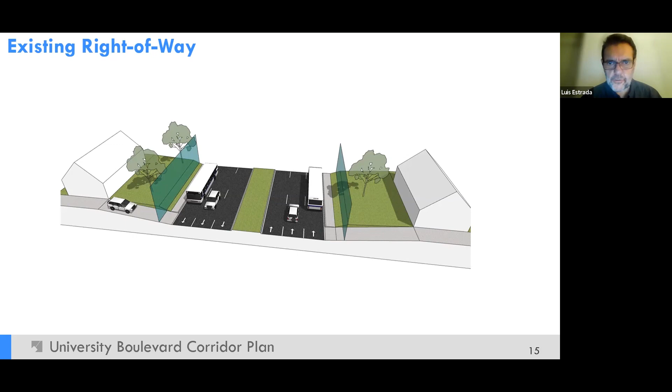For those of you who are familiar or not, the right-of-way is the land reserved for passage of vehicles, utilities, or people once a subdivision is created. Those strips of land reserved for mobility purposes are, for the most part, either owned by the state or the county. It's important for us to help convey how much space we have available so it's clear what parameters we'll be working within.

We have two snippets of record plats of a couple of subdivisions along the University Boulevard corridor that show the two prevailing conditions as far as boundaries are concerned. On the right-hand side, we have a segment of a subdivision recorded when the road was still referred to as Old Bladensburg Road. Back then, the recommended right-of-way - the distance between property lines across the road - was 100 feet total, and most subdivisions back then dedicated to 100 feet. That's what's recorded for the most part on the land records.

On the left-hand side, we have a different condition. Starting around the 1970s and 80s, a number of master plans for the various communities along the road recommended a greater right-of-way, foreseeing a greater need for space as the county grew over the years. After those plans were approved, recommending a right-of-way of 120 feet, any subdivision that came after dedicated to that number - 120 feet.

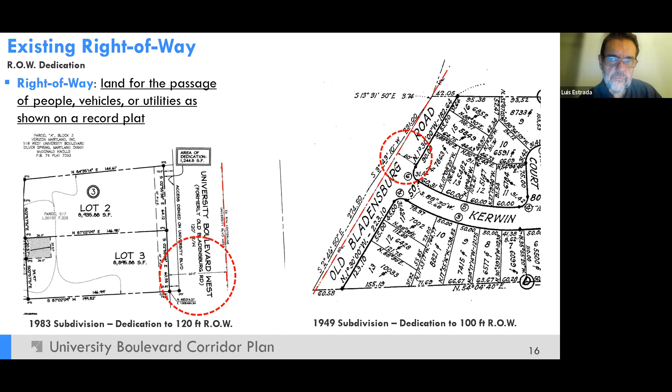As a result, if you go to the next slide, we have the condition illustrated on the map on the left-hand side, where you have a combination of blue and pink lines. That irregular condition is what we have in the corridor today - those are the lines on the land records as they exist today. Some of the lines, the blue ones, still conform to the 100 feet dimension - that's our primary condition. The pink lines are segments of the road that were subdivided at a later date and dedicated to 120 feet.

Those two conditions are to the extent that they are mapped on the road are on the land records. On the right-hand side, the lines that you see in red, we have another set of parameters that we will also be looking at.

In 2013, the Countywide Transit Corridors Functional Master Plan recommended that the overall right-of-way for the road would grow to 124 feet. Again, as a recommendation made thinking about the future of the road and the future needs of the communities along the road and the kind of facilities that are projected to be accommodated within those boundaries. And there's always an expectation that perhaps a bit more space will be needed.

What we will be doing as part of this master plan is evaluating all these different dimensions and trying to figure out how can we tighten up this envelope. If you go to the next slide.

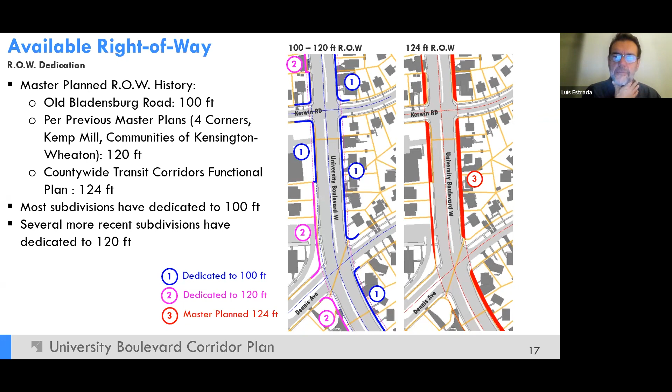This is a map that actually illustrates not what's mapped out and recorded on the ground, but what the recommendations are for the various segments of University Boulevard that are included as part of this master plan. And as you can see, we actually have master plan recommendations. Again, there's a clear distinction between a master plan recommendation and what's mapped on the land records. These are master plan recommendations.

We have, for example, a segment between Amherst Avenue and Dayton Street. This is close to the Wheaton CBD area, and that segment is recommended for 150 feet because it was expected that a greater intensity of uses and transit services would be needed as you get closer to the CBD.

Then between Dayton and Lorain Avenue, the master plan recommendation for the longer segment is the 124 dimension that I mentioned before. Then between Lorain Avenue and Williamsburg Drive, the recommendation is still from the master plans created in the 70s and 80s, which was 120 feet. And then the remaining leg, between Williamsburg Drive and 495, is 124.

All these are, again, master plan recommendations. And part of what we do in a master plan like the one we're doing right now is assess how we can tighten that by exploring the actual facilities we'll be including within the right of way. Next slide.

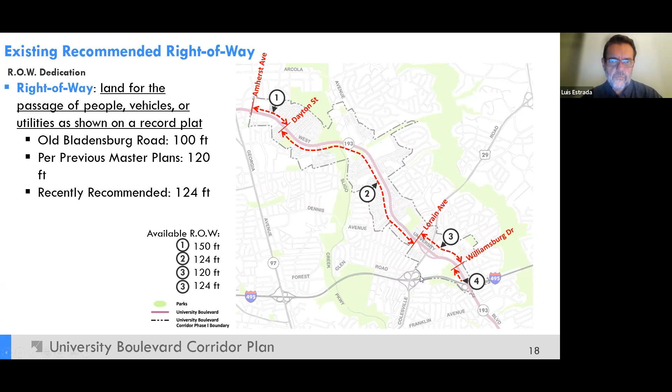As a guide to determine how those facilities will lay out, we're following the guidance of the Complete Streets Guide that the planning department prepared and put together, approved and published in 2021. That guide explored all the different types of roads we have within the county and came up with prototypes that break down the different components you ideally want to include in each type of road if you were to improve it.

There's a menu of elements loosely illustrated here, and I can go further into that later in my slides. The type of road recommended for this is a boulevard type, because it provides cross-county and regional connectivity, which University Boulevard does. It includes a variety of building and land uses, bicycle and pedestrian infrastructure, various land use types, landscaping and street lighting, as well as dedicated facilities for buses. That combination of elements is what we will be exploring as part of this master plan.

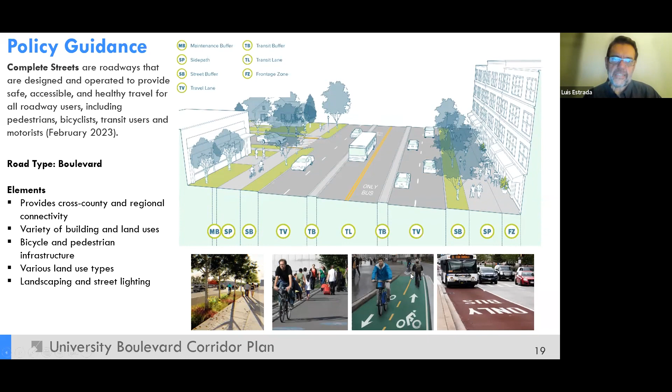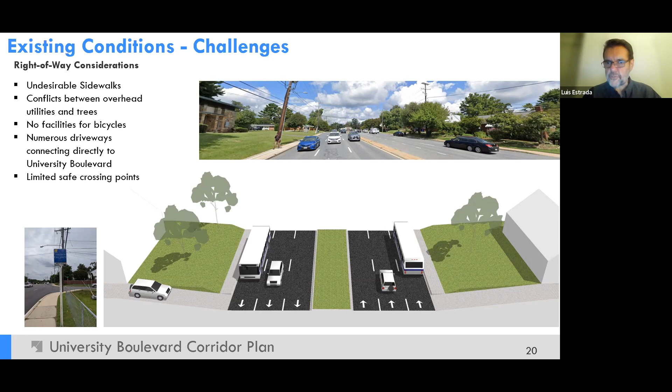Next slide. But of course, there are challenges, and we also wanted to help you visualize the extent of the space we have to work with, and how that relates to the structures along University Boulevard today. Next slide.

This is an illustration of roughly the condition we have on the road today. We do have, for the most part, homes fronting on University Boulevard. We also have multifamily buildings, and some institutional and commercial uses, but the prevailing use is residential. We wanted to help you see that the extent of the basic right-of-way mapped out today includes the totality of the road pavement, the sidewalks that exist today, and a little bit of grass beyond the sidewalks that is also part of the existing right-of-way.

Now, this illustration is reflecting the original old Bladensburg Road right-of-way, which was 100 feet. There's a bit of an extension to that with the 120 I mentioned before, which is not illustrated in this image.

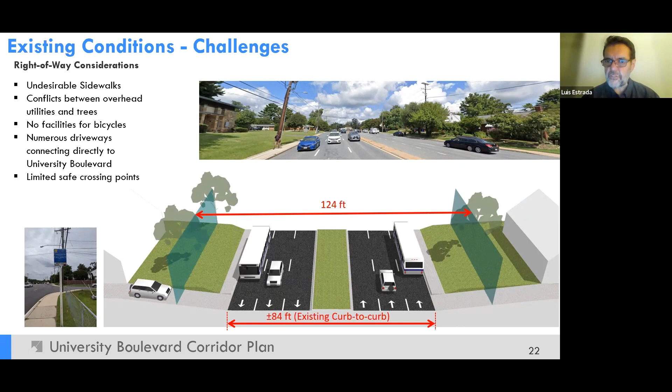If we go to the next slide, this is a summary slide that includes all the elements we'll be looking at as we consider the space we have available and all the wishes that exist for that space.

We're looking for improving safety. We're looking to improve access management to and from the road. To the extent possible, we're looking to have continuous sidewalks and bikeways, and safe street crossings at more frequent locations than we have today, and also to achieve safety by separating the different mobility types. We'll be exploring the possibility of having wider and buffered sidewalks—by buffered, we mean protected from the vehicles on the road.

We will look for the opportunity to implement a continuous shared use path. A shared use path is a facility in which bicycles and pedestrians use the same space, versus protected bikeway facilities, which are dedicated facilities only for bicycles.

And then, of course, we'll be looking at alternatives for what dedicated transit means within a corridor like this, and what would make sense to implement here. The illustration on the left-hand side is a combination of the various things we'll be exploring as part of the master plan, showing the type of resolution we're hoping to achieve in our conversations with you throughout this process.

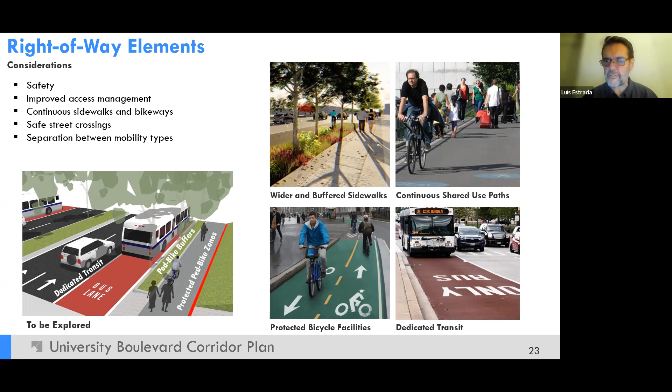Great, thank you Luis. On the next slide, I'll give a mini overview of the topics I'll be talking about—three big points. I wanted to start with a little context about the Complete Streets policy in Montgomery County, then talk about the master plan transportation adequacy measures we were required to evaluate the plan with, and finally some other important transportation considerations.

I apologize for starting by reading verbatim from a slide, but this is important context. The Montgomery County Code lays out a Complete Streets policy for the county, and this is the policy framework we're working in as we begin our analysis and think about recommendations for the plan. The policy states that each county road and street must be designed so that the safety and convenience of all users of the roadway system—including pedestrians, bicyclists, transit users, automobile drivers, commercial vehicles and freight haulers, and emergency service vehicles—is accommodated. Each road and street must facilitate multimodal use and assure that all users can travel safely in the public right-of-way.

I wanted to lead off with that, since Luis just showed a variety of different treatments we'll be considering. Again, we don't have specific recommendations yet, but these are the needs we're thinking about as we plan for the corridor.

On the next slide, another thing we're required to do once we've completed our recommendations is evaluate them for transportation adequacy. Historically, the way that was done was with vehicular level of service. On the next slide, I'll explain a bit more what that is.

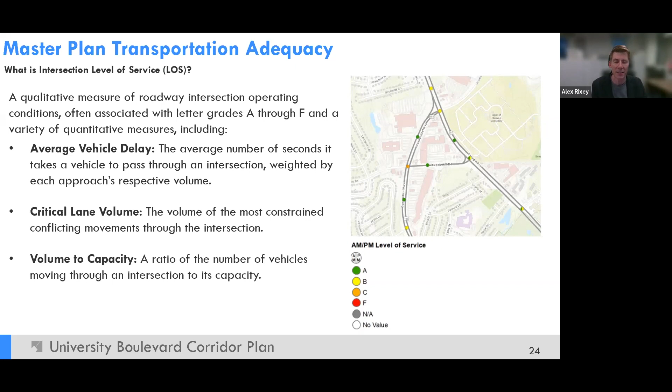The first one is accessibility to jobs, measured for auto and separately for transit. Travel time for all trips, measured for auto and transit. Vehicle miles traveled per capita. Non-auto driver mode share for journey to work trips, and low stress bicycle accessibility.

One finer point is that low stress bicycle accessibility is assessed for the effect of any changes in the plan area on accessibility throughout the entire county, while the other metrics are reported at the policy area level, which is a geography that's much tighter to the plan area.

That first measure, accessibility to jobs, is a measure of the number of jobs that can be reached within 45 minutes. One of those measures is for auto, and it's measured the same way but separately for transit.

The figure on the screen shows an example from downtown Bethesda of the area that can be reached within 45 minutes by auto during the peak commute period, and a similar figure for transit. You can see that the area covered by transit is much smaller than that by auto. The metric would take all of the jobs located in that area, sum them all up, and that would be the number of jobs that could be accessed.

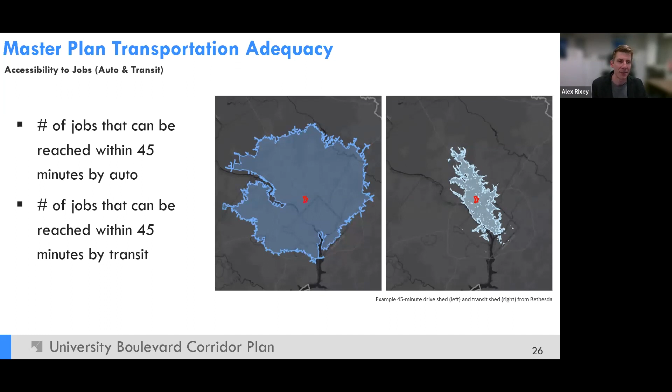Travel time was the next measure, and this reflects the total amount of time people need to travel to accomplish their trip purposes. This is for all of the trips, not just commute trips, but all trips to and from the area on a weekday. This also would have separate values for auto and transit.

For this one, you would add up the time it takes to make all of the trips to, from, or within the corridor, and average that out. That could include commute trips, trips for shopping, visiting family and friends - any of these purposes would be included, then divided by the number of trips to calculate an average per trip travel time.

The third measure is vehicle miles traveled per capita, which is a measure of the total weekday vehicle miles traveled for trips to, from, and within the area, divided by the total residents and workers served. This starts from a similar place as the travel time metric, but instead of measuring time, we're measuring the total distance.

This is only for trips made by automobile. We're summing up all of the miles traveled in a vehicle, then dividing that total by all of the people in the area - both the residents who live here and also the workers who are present in the area.

Fourth measure is non-auto driver mode share, and this is the percent of commute trips made by a mode other than driving alone. That could include walking, biking, rolling, carpooling, taking the bus, taking the train, and a variety of other travel modes. You sum up all of the trips made by all modes as the denominator, and then all of the trips except for single occupant vehicle trips, and that's the non-auto driver mode share.

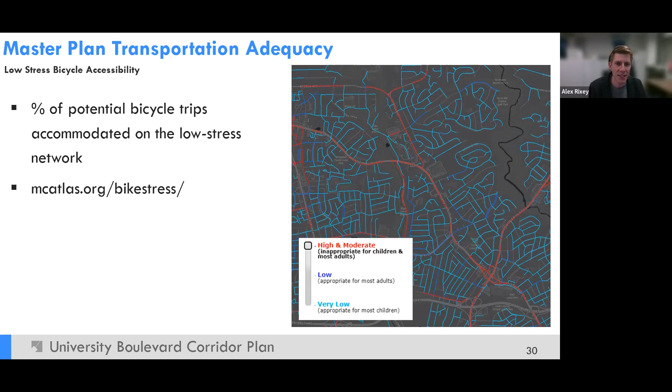Next slide. So those are the measures that we are required to evaluate to ensure that the plan is adequate from a transportation adequacy perspective. But there are, of course, a lot of other important transportation considerations that we'll have in mind as we're developing recommendations for the plan.

I'll go into a little bit more detail on these as well, but some of the key factors we're thinking about are eliminating severe and fatal crashes, and in service of that, controlling speeds, pedestrian safety and comfort, including an improved streetscape, bicycle safety and comfort, transit service, and vehicular volumes.

Next slide. So eliminating severe and fatal crashes - this figure shows the serious injury and fatal crashes between 2015 and 2020, the most recent available data that we have. You can see that there are lots of crashes along University Boulevard, unfortunately. This figure just shows the severe and fatal crashes, but you can also find on our website a similar map that includes all of the crashes.

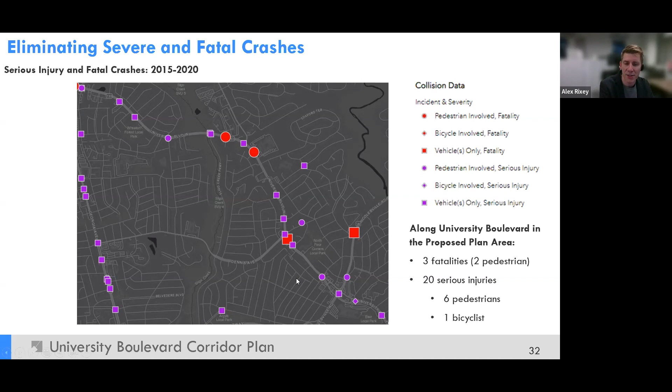In this time period, there were 3 fatalities, 2 of which were pedestrians, and 20 serious injuries, 6 of whom were pedestrians and 1 bicyclist. So this is certainly something we're concerned about and working to improve.

Next slide. In that vein, I wanted to mention Vision Zero and the concept of Vision Zero. Vision Zero is an international effort to achieve 0 deaths and serious injuries on our roadways due to traffic crashes. This is international and also in the United States, where it's in response to approximately 40,000 traffic fatalities we've been experiencing annually. I wanted to highlight that Montgomery County has a Vision Zero policy that was adopted in 2017.

A little bit about Vision Zero and how it contrasts with the traditional approach to traffic safety. Traditionally, traffic deaths have been thought of as inevitable, and we've seen, unfortunately, far too many of them. Vision Zero takes the approach that traffic deaths are preventable, so there are things we can do to eliminate severe and fatal crashes. The traditional design approach expects perfect human behavior, while Vision Zero understands and acknowledges that human failing is possible, and it integrates the possibility of human failing into the approach.

The traditional approach is to prevent collisions, whereas the Vision Zero approach acknowledges that collisions will occur, but the effort is to prevent fatal and severe crashes. I'll talk in a moment about how we focus on that. The traditional approach includes focusing on individual responsibility, and Vision Zero takes more of a systems approach. While individuals do have responsibility for their actions, they are operating in a broader system that needs to be designed to allow for human failure without the consequence of severe injury or fatality. Finally, the conventional wisdom is that saving lives is expensive, and the Vision Zero approach is that saving lives is not expensive - we just have to make the right decisions.

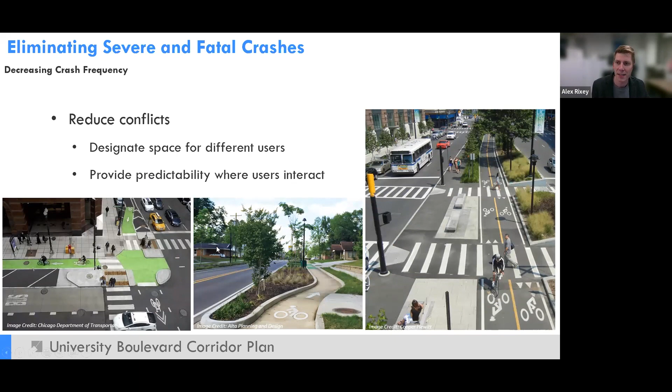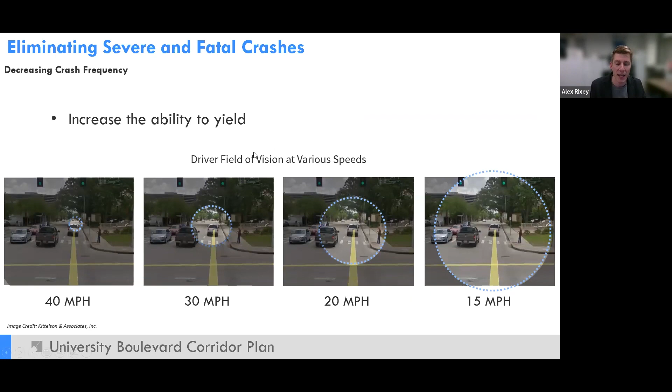One other thing we can do to decrease crash frequency is increase the ability of drivers and other road users to yield, and speed is a major factor in that ability. The figure on the screen shows the field of vision at various speeds ranging from 40 miles per hour down to 15 miles per hour. At 40 miles per hour, the driver's vision is concentrated in a very narrow field and requires them to scan across the roadway to see different locations. Whereas as you approach slower speeds, 15 miles per hour, the pedestrian standing on the corner comes into the field of view and would allow the driver to yield to that pedestrian.

Everything I've been describing is based on national and international research and information, but I also wanted to highlight that the department has conducted a predictive safety assessment, an analysis of roadway factors and crash experience within Montgomery County itself. Some of the things they found were, as expected, that as activity increases and exposure increases, crashes increase. But even controlling for that, wider roadways are associated with significantly increased numbers of crashes. Increasing from 2 lanes to 4 lanes, or from 4 lanes to 6 lanes, increases the likelihood of a crash by 40% each time.

Higher speeds are also associated with increased crash risk. A 5 mile per hour increase in the speed limit increases crash likelihood by 15%, and a 10 mile per hour increase increases the likelihood even further, to 32%.

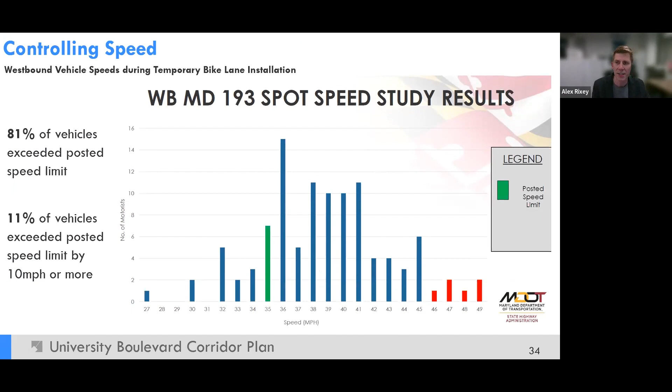With the understanding that speed is an important factor in crashes, I wanted to share some information collected by MDOT-SHA during the temporary bike lane installation. This shows the speeds on University Boulevard traveling westbound. 81% of the vehicles were exceeding the posted speed limit of 35 miles per hour. So if you think back to that survival rate image, that puts many of the vehicles at 40 miles per hour or above, which makes it extremely unlikely that a pedestrian would survive a crash.

This shows similar information for the eastbound direction. Again, 86% of vehicles in this case were exceeding the posted speed limit, and 16% of the vehicles exceeded the speed limit by 10 miles per hour or more.

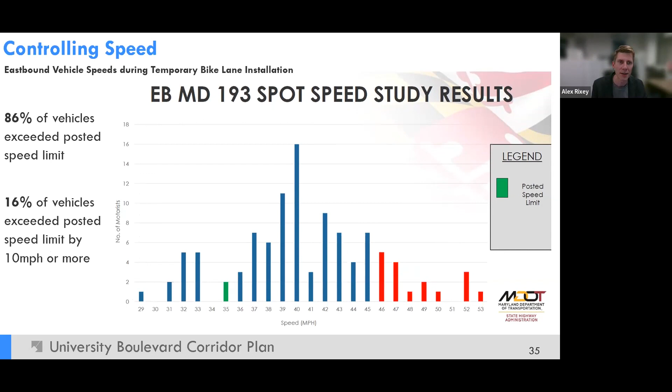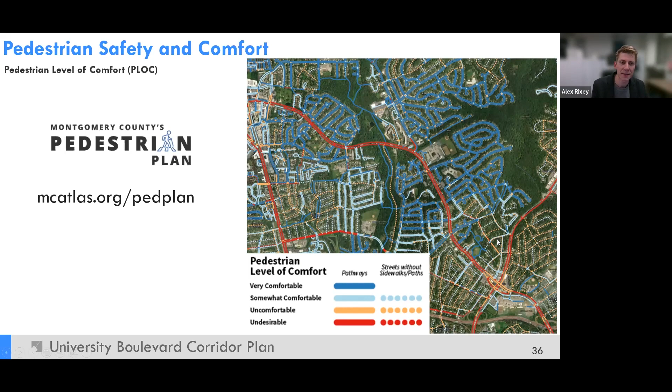Transit service is also an important consideration for the plan. Montgomery County Ride-On operates service along the corridor, as does Metrobus. There's an upcoming MCDOT tactical bus-only lane project between Amherst and Dennis, and we can probably share information on the MCDOT website for that; they'll be conducting a separate community meeting, I believe on March 30th. This is also a planned bus rapid transit corridor, according to the Countywide Transit Corridors Functional Master Plan. I wanted to highlight the importance of the intersection of University and Columbia Pike, or 29, where there's a connection to the existing Ride-On Flash blue and orange routes, and a project underway there to provide dedicated lanes for that service. So this is a key transit intersection.

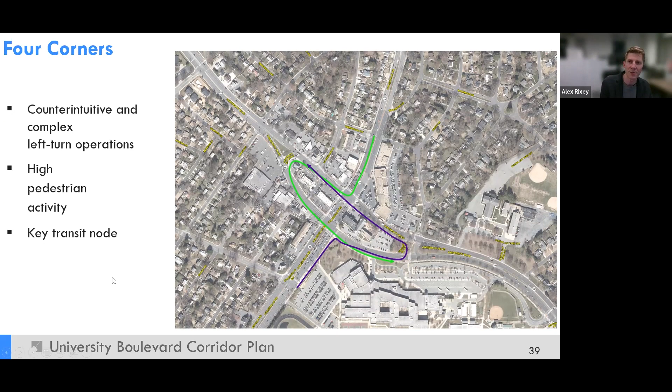And with that, I'll turn it back over to Nkosi to describe our future engagement.

Thank you, Alex. Appreciate it. So coming next, we'll have a variety of additional public meetings, and the next one is going to be about next month. We're really going to do something a little bit different - it's going to be more of a community-oriented workshop, starting to listen to what the public's saying, public's desires, etc. More information on that will be forthcoming in the next several weeks.

As we continue to move forward, we'll be addressing issues regarding economic development and housing, parks, open space, historic preservation, environmental and sustainability measures as well. So it's a comprehensive plan, and these are the elements we'll be presenting and listening to the public's issues, concerns and recommendations on, as well as targeting specific areas of the plan, especially the multifamily buildings - figuring out how we could work with some of those property owners, looking at specific engagement regarding the Hispanic community, and being willing and open to doing walking tours, workshops, etc., with members of the public.

We've set up an interactive map that's available on the project's website, where you could go in and add your comments and perspective on how to potentially make different changes along the corridor. It's quite a useful tool - something we've used in the department and in other plan areas. So definitely invite all the participants on this webinar to go online, check it out, participate, and put in your comments there.